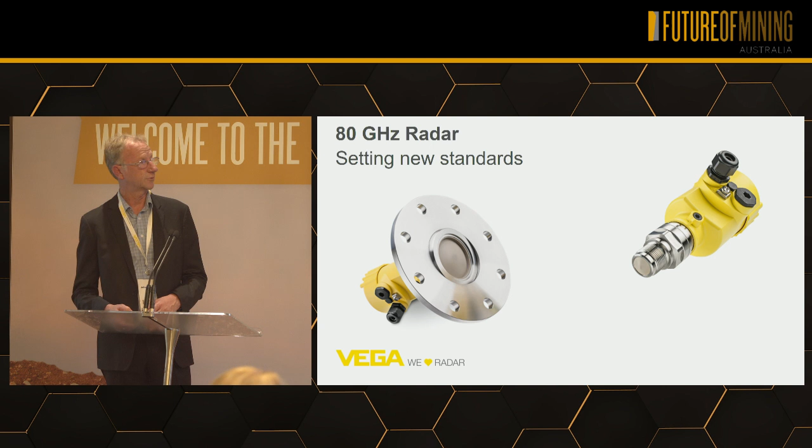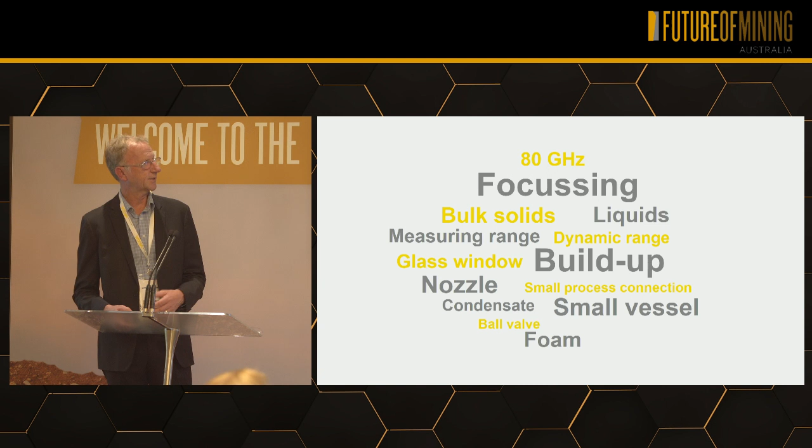These are the sort of things that we picked up in the past that were sort of not faults but challenges. So we looked at all of these particular feedbacks and said, right, we need to develop something that's going to overcome some of these obstacles.

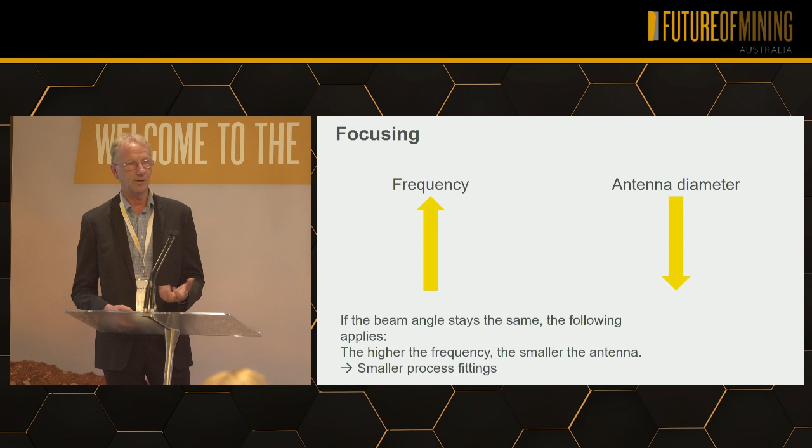Principle of radar: as your frequency goes up, your actual antenna size comes down. The natural outcome from there is you end up with a narrower, more focused beam angle. So traditionally in 26 gigahertz, you had a fitting of 1.5 inch, or DN50, you ended up with a 20 or 15 degree beam angle.

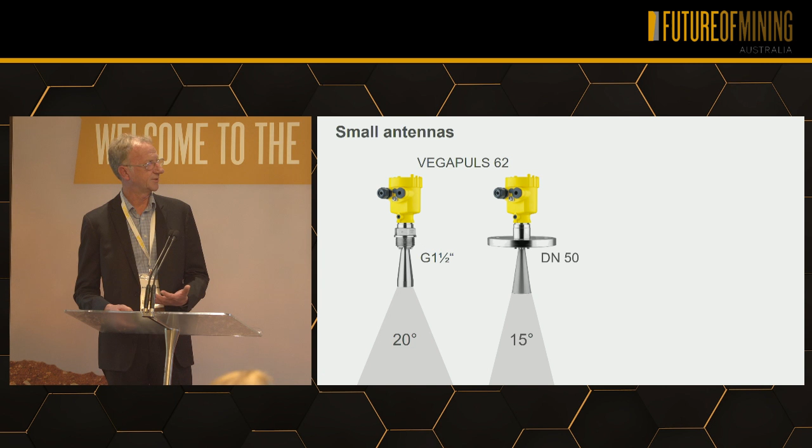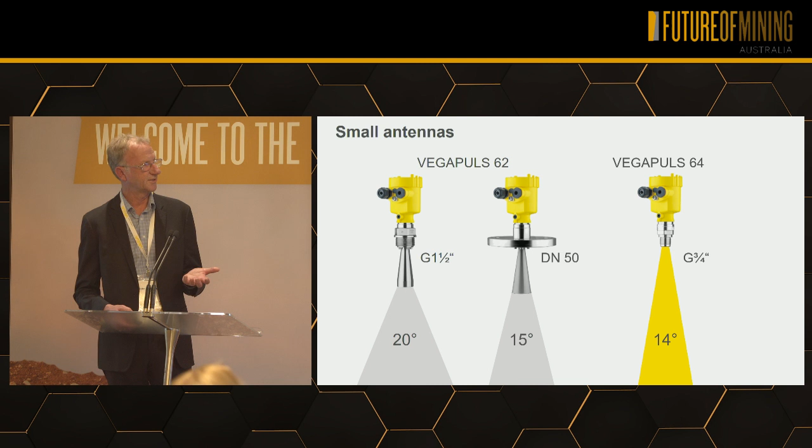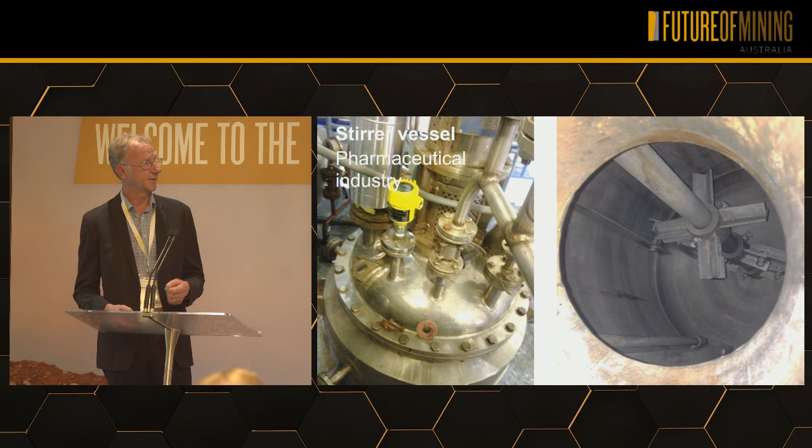Now that we're bringing the actual antenna down to a 3/4 inch, you actually end up with a 14 degree beam angle. The larger you make that process connection or antenna, the narrower your beam. Therefore you're able to get around a lot of obstacles, such as agitators inside vessels. You're actually able now to focus on your real level rather than picking up the echoes from the agitators.

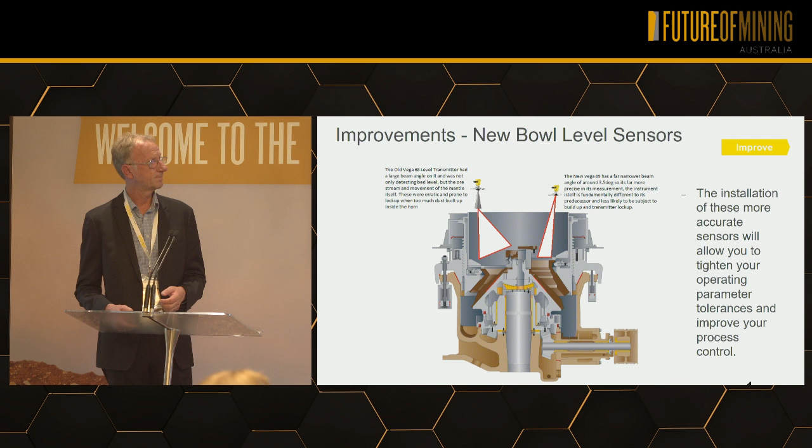Traditionally we had 96 decibels of dynamic range or energy from the system itself. With the development of our 80 gigahertz, you've now increased that by 200 times, or 24 decibels. So we're getting a much stronger signal back, so when we've got a lower or less conductive product, we're actually getting a better return of signal.

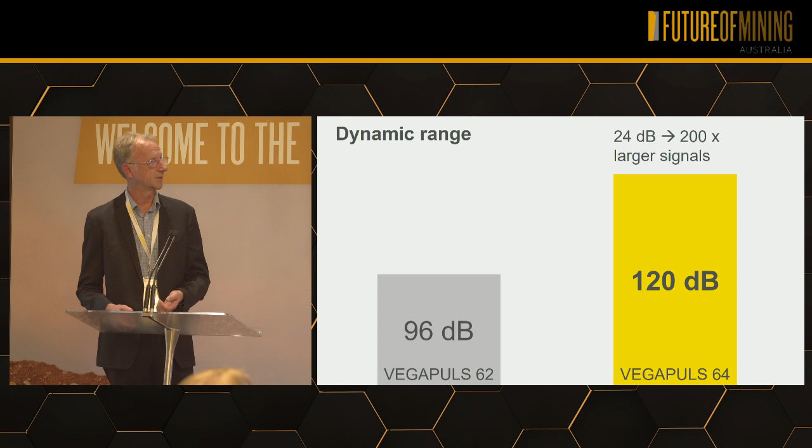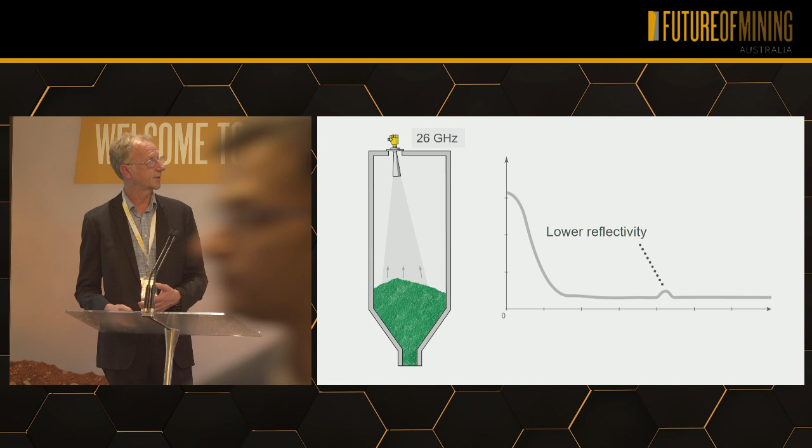Traditionally in an application for 26 gigahertz, you would send down your transmission and you would pick up off low dielectric materials a very small echo. You change that over now to the higher range unit, send down your signal, and you're getting a much higher signal return, so therefore you're getting a much stronger, more reliable signal from your materials.

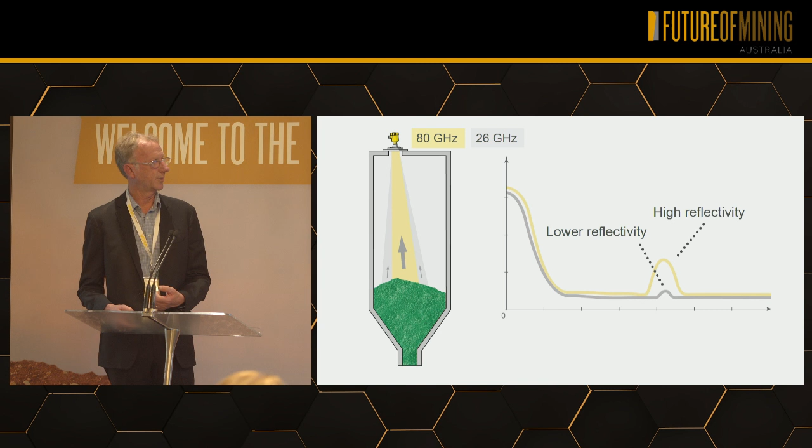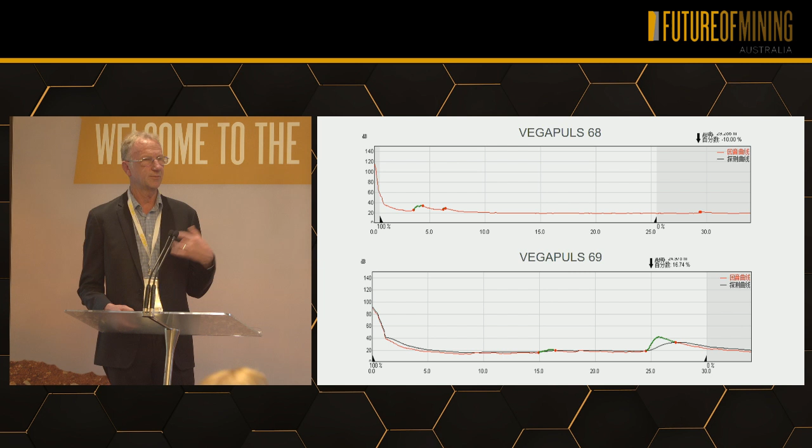Again, with 26 gigahertz, build up inside the vessel itself - if that's inside the beam angle, it's going to see that build up. Those build ups can create false echoes, which means you get false readings. And the more build up you have, the worse it gets.

As you shift over to the narrower beams, you're getting a much stronger signal. You're not seeing the sides of the vessels. You're not picking up any build up. One signal, one return.

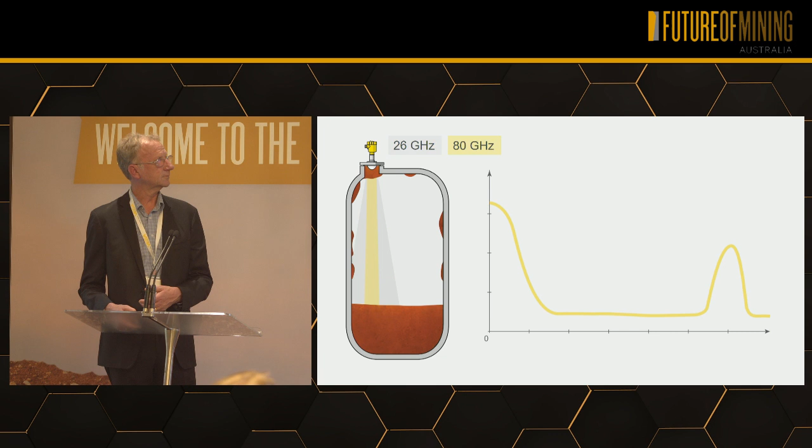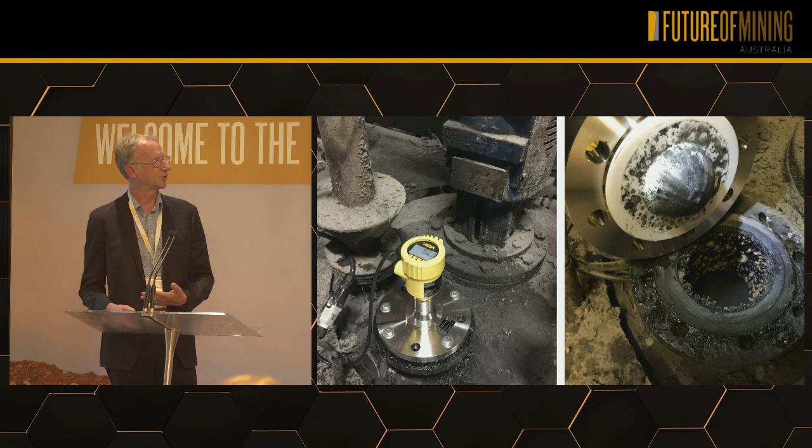In comparison there, build up, as shown here on a bitumen tank, where you've got bitumen on the face. You're not able to see that bitumen, therefore you're not getting a reflection from it or blocking the signals.

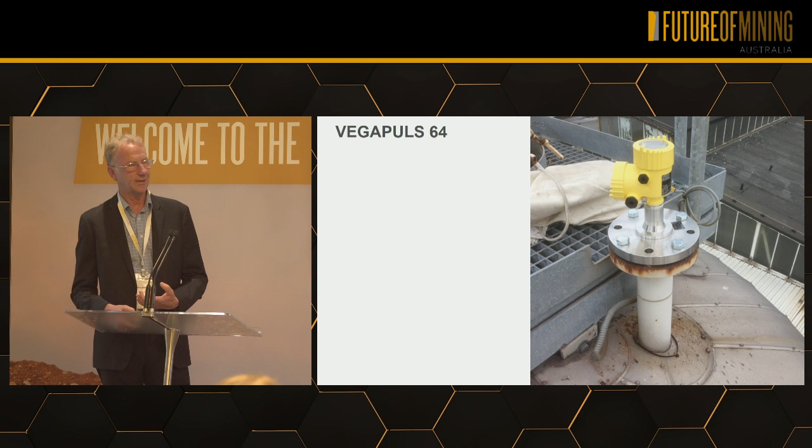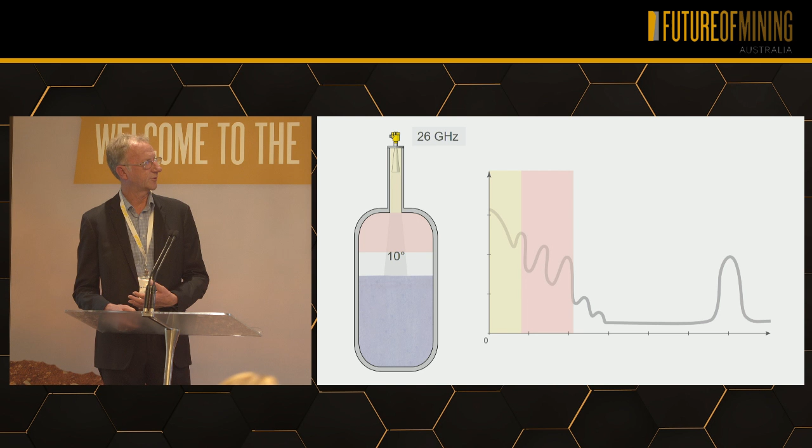We don't control how people install the units, but in these cases here, they're installed in large standoffs. Traditionally what would happen in these sort of areas is that you'd end up with a lot of ringing inside that tube before it actually came down and read the real level. You've got so many different zones that it's focusing on, it ends up losing the signal.

Change it over to the 80 gigahertz frequency. We're not seeing anything inside the standoffs, and all the echo that we're getting is the one echo from the material itself, much stronger, much more reliable.

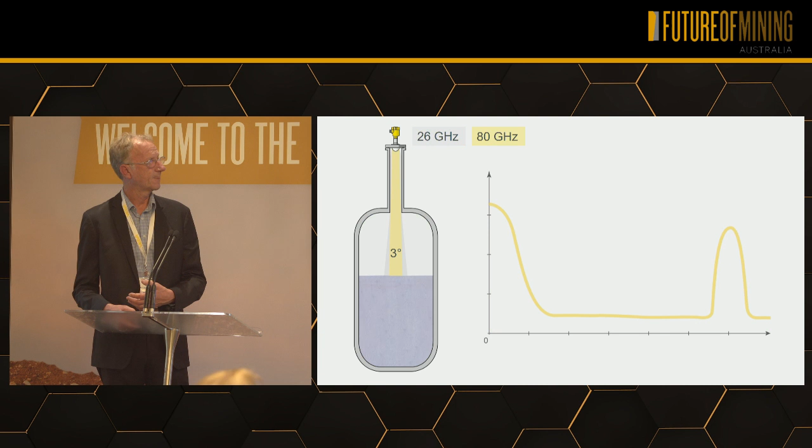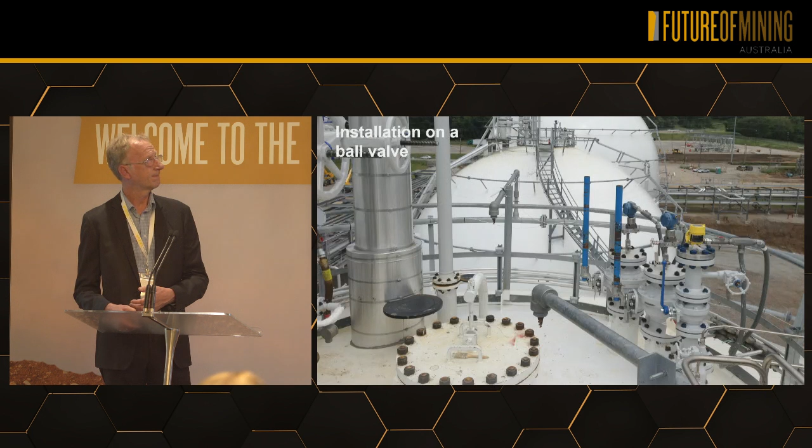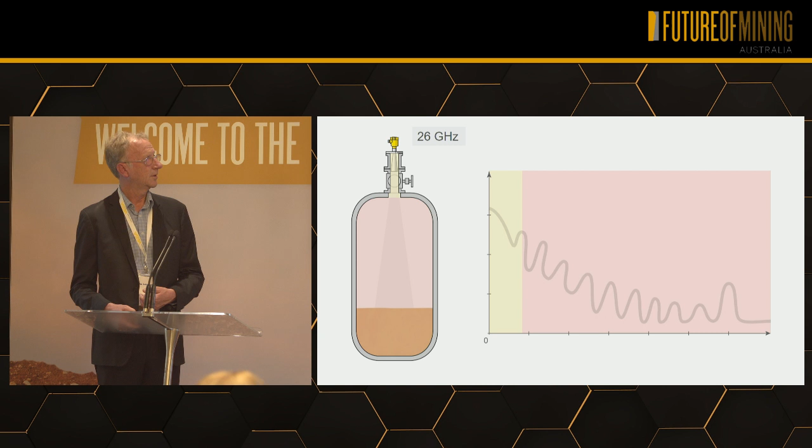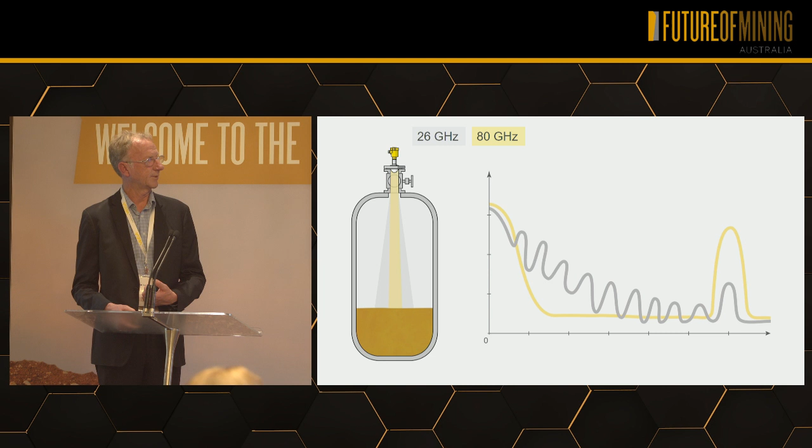700mm socket here, one single echo coming back, no interference. Ball valves, again the same problem, is that you're going to get a lot of ringing inside the valve stems themselves, creating a situation where you don't even know which is the real echo anymore. By going through and changing over to a high frequency, you're able to get around those issues. You're not picking up those ringing echoes, and you've got a much more reliable signal coming back, as in the example there.

Moving into another part is differential pressure. In differential pressure, we again looked at feedback, and we're able to now give a much more precise type of instrument now.

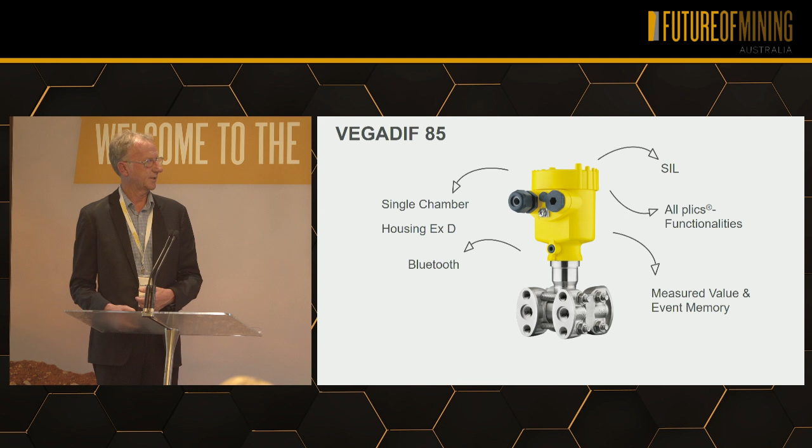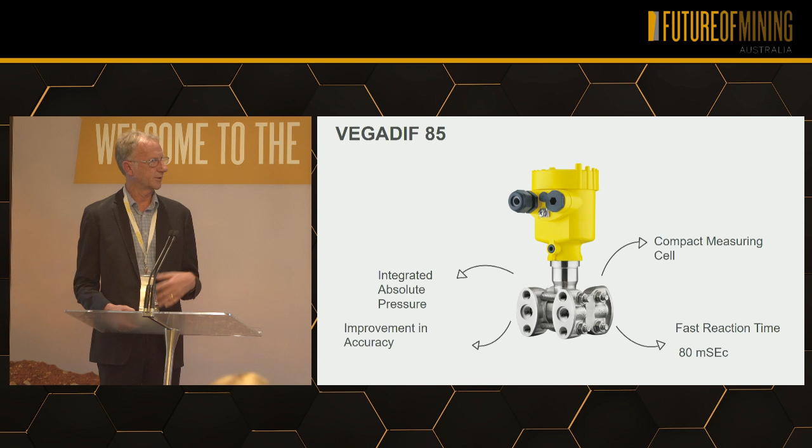Bluetooth technology is something that the future is holding. We've been doing it now for about 2 years - communication through smartphones, iPads, tablets. From there, single chamber EXD, SIL approvals, and you get your measured value and an event memory, in other words, asset management. What you're also getting out of there is 2 outputs, one for your differential pressure and one for your static pressure. So you can have them as 2 separate outputs, faster response times, improvement to accuracies. So again, development of a technology by getting more out of the technology from there.

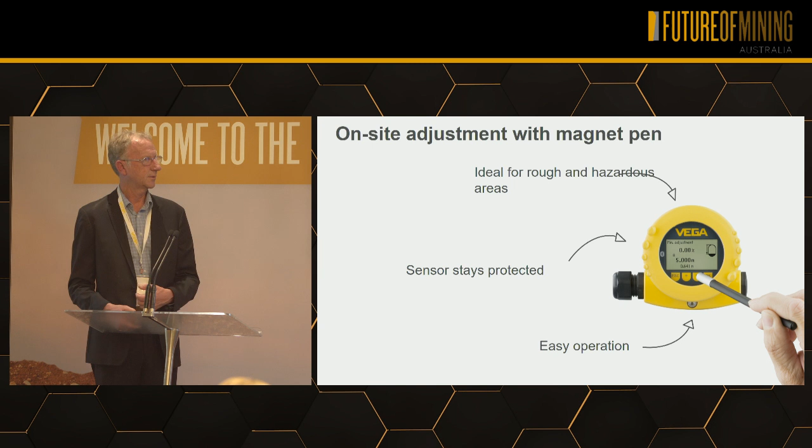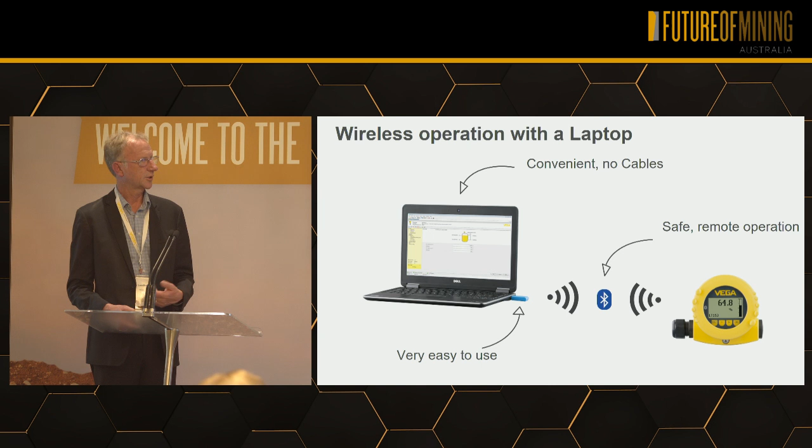Bluetooth, as I said, Bluetooth devices now, across the transmitters. In an EXD environment, you're actually able to operate this through the glass lid, where you can do the programming with a magnetic pen. So therefore you don't require to go in there and break the integrity of the EX area. It can be done via a laptop, communication, Bluetooth 4, communicating directly to the instrument, roughly about 20 to 25 metre range. It can be done through a smartphone or a tablet. The apps are downloadable from the app stores, free of charge, and you just communicate through and away you go.

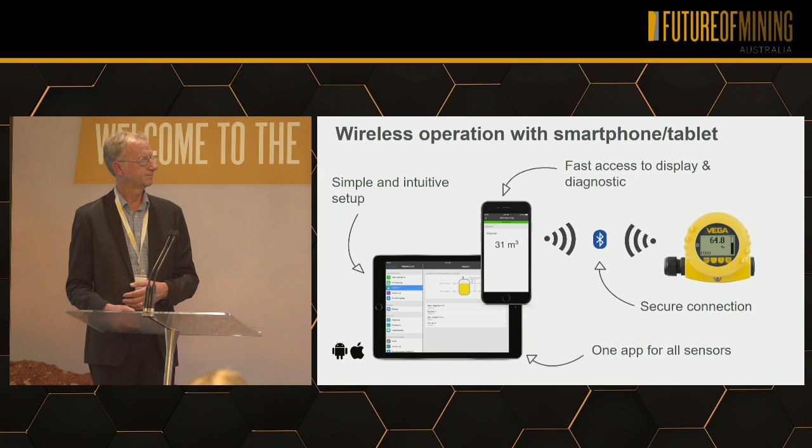Industry 4. Traditionally what we've looked at with Industry 4 is the 4 stages of industry development, from 1784 right through to today. So we've looked at the fact that you've got all your different levels of communication and management. What we've had to do here is look at the fact that everybody has access to the same information, through a cloud service.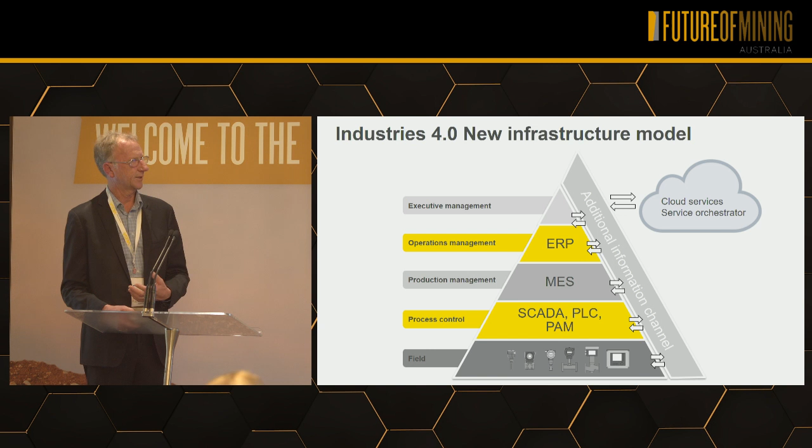Traditionally it's been done through HART, Profibus, Bluetooth communications, and signal conditioning through Ethernet or Modbus. Future which we're under development now is for Profinet and OPC UA - these are currently under development. If we look at mobile communication through the networks, GSM, GPRS are all available, or through the router systems, Wi-Fi, Ethernet, Bluetooth. Again, under development, and heading towards 5G networks.

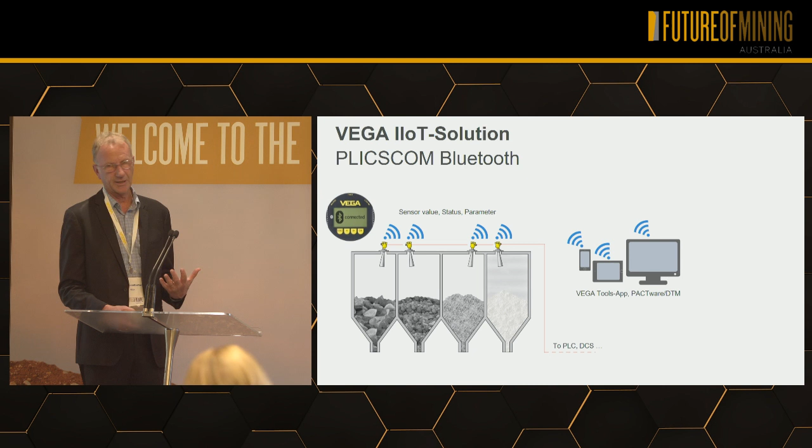So traditionally with Bluetooth communication, it's a case of accessing the information so that you can keep maintenance, stability, everything like that with your instrumentation. So this is a communication, not an output, using this type of system.

The development now is through a Bluetooth gateway where that information can be uploaded to the cloud, and then you can access that information from the cloud. It can be displayed remotely. So it is a case of developing Bluetooth now more as a communication path, as well as an output path.

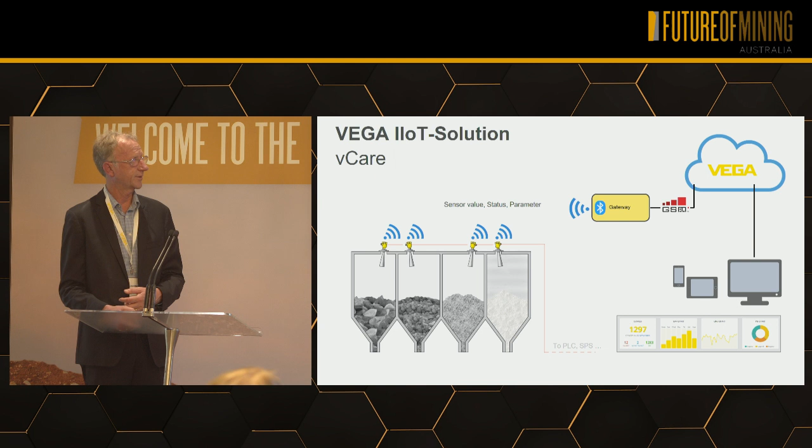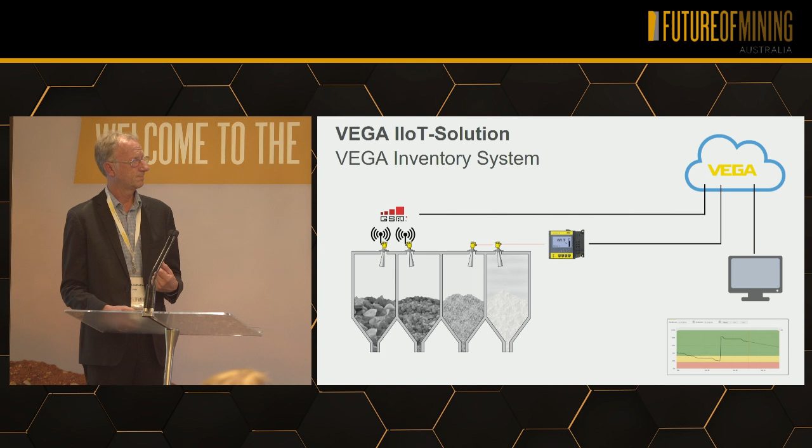Wi-Fi networks, hardwired networks, all go up into the cloud, and that information can be accessed remotely. Again with Bluetooth, up through the gateway into the Vega cloud, and that can be accessed by third-party systems. So again, development towards third-party access through SAP, OPC UA, where you're able to access your own information and control your network and your instrumentation.

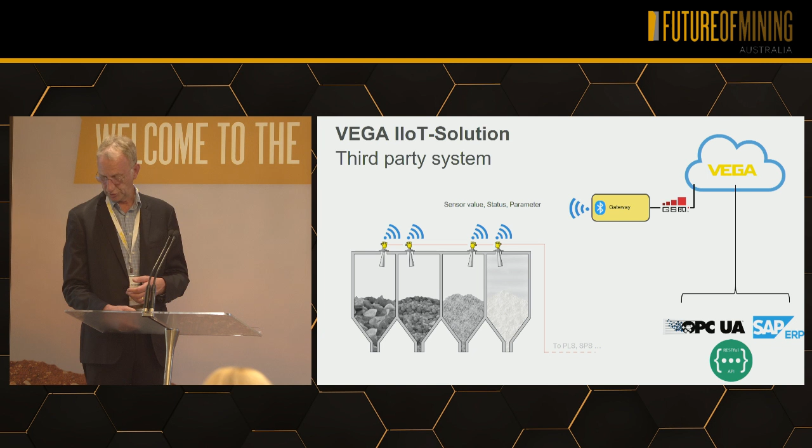Okay, so that's briefly it. We're over on stand 17, that's a brief overview. If anybody wants to come across and actually see the units demonstrated in those types of applications or the communications, by all means feel free.

Any questions? Nice. Thank you.

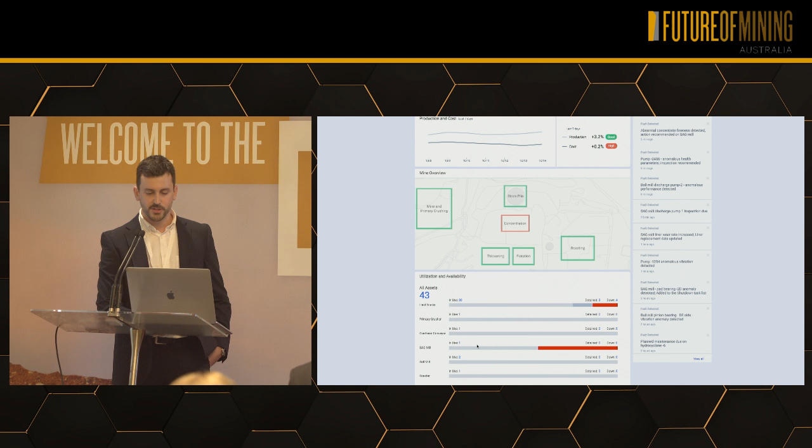We can see production rates, how I'm doing next to the thresholds and objectives I've set up as a company. I can have a quick view of the sectors of my plant, and I can go down and see, of the 30 haul trucks that I have, 3 are detected, 4 are down. But what I really see is a problem in the SAG mill. I have only 1, and the health status of that machine is not ideal. I actually have a problem there.

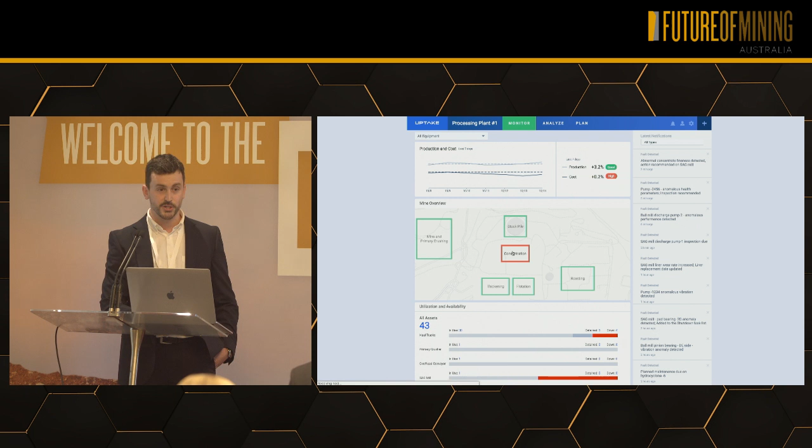So I want to go deep, and this is the moment where the VP of Ops picks up the phone and says, hey, I want to talk with the maintenance manager in charge of this concentration plant, and I want to drive my discussions around the SAG mill. I can see that I have a few bilge pumps, but I know that in a forward-looking approach to maintenance, this SAG mill is at risk.

So I click there, and again, I have a quick view of how my asset is running, if I'm getting the KPIs I've set up for that asset, what's the throughput, what has the history been for this asset in the past week, the past month. This is highly configurable. I can show whatever KPI is important for me, or whatever information I can surface from different systems, from ERP such as SAP or Oracle. I can bring data coming from condition monitoring systems, vibration data. We're going to see that in a second.

In this case, the customer was interested in monitoring liner wear. It was a big expense for them to do the 3D scans and decide when was the right time to change the liner. So one of the things we did for them was help them out with their plant maintenance strategy.

By doing this, we leverage a huge library that Uptake has recently acquired from the energy, nuclear, and manufacturing space, called the Asset Strategy Library. This strategy library covers around 800 assets and all the different failure modes in which those assets can fail. So we were seeing, by looking at SAP data, the most important failure contributors we needed to attack.

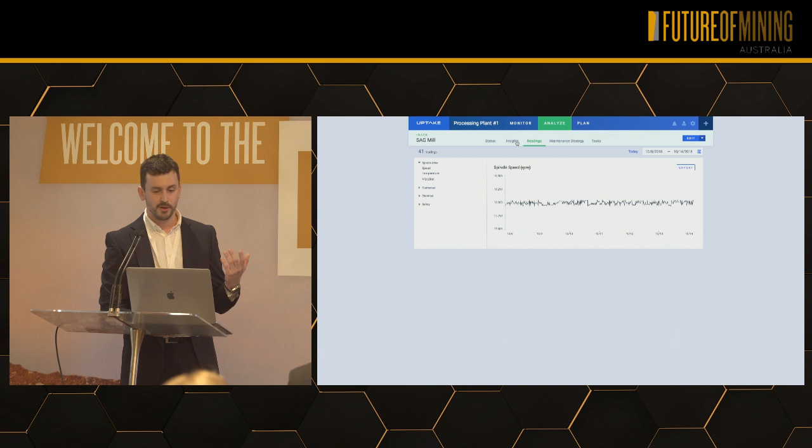But actually, I can go from looking at data coming from the machine, what's the speed, and this is when it gets really interesting, because you can have actual machine learning algorithms that are able to detect anomalies or predict failures.

In this case, our model was looking at different sources of data coming from the machine: RPM, torque, amount of water the machine was handling, the size of the balls inside the SAG mill, and eventually one of the most important readings we were having was the oil pressure at the pockets of the machine.

By looking at all these signals simultaneously, we were able to detect multivariate anomalous behavior and give an insight to this customer, saying, hey, we think this liner will have a high chance of wearing out in about a week. So it's about time you have an inspection made and get your maintenance team working to change that.

What's really interesting is that from this tool, you can go and take action on it. You can go and create a task. This will push the information to your ERP system, to your SAP, to your Maximo. Once you do that, the beauty of this is that by looking at past data, you can pre-populate work order data, and that will save time and save data entry errors from your technicians.

When you go and submit a task, you would actually create a plan, an action plan for this activity. And when you go and see what tasks I have opened for this plant, I can actually see the last one I created for the SAG mill.

But it's certainly frustrating. So the first area, and my background is predominantly underground, was a typical underground coal mine. When I sat and looked at it, we take the most amount of jobs, the most amount of people, the highest risk activities, the most mobile and diesel equipment, and we stick it in the most congested part of the pit, and we expect it to perform. Then when it doesn't, we all sit together the next day, scratch our heads, and say, okay, we'll do it better next time. But we do it every time as if it's the first time we've ever done it, and it doesn't improve.

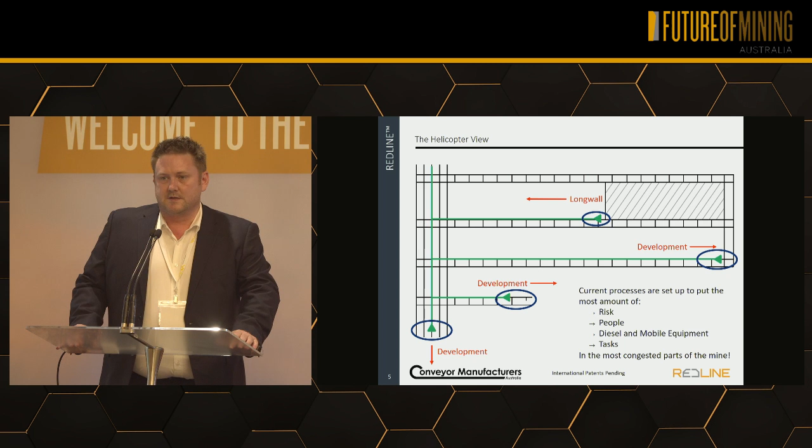And you come to conferences like this, and we talk about the same sort of stuff. So we decided to look at it from a process point of view, not from an equipment point of view. Process isn't nearly as sexy or exciting as looking at new equipment.

So basically what we did is we took as many of those tasks and jobs that are typically done at the in-by end, and we moved them out. So the guys and girls at the face, they are there to cut coal, and that's it.

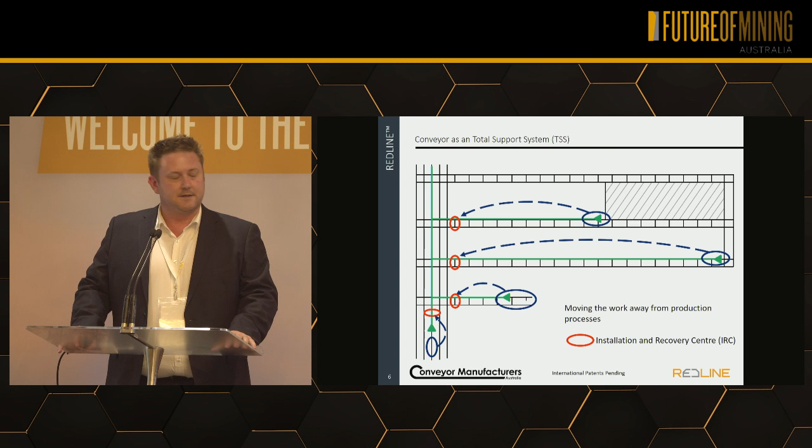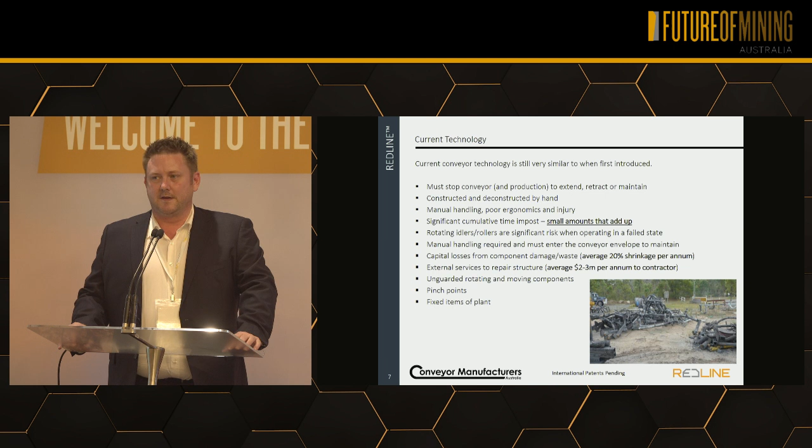All of those other jobs, wherever possible, get taken out and divorced from the process. This was a mine I was loosely associated with, thank God I wasn't the manager, but that's how they managed their conveyor structure. Came out from underground, was tipped in a pile, guys at $70 an hour on overtime spent all shift sorting through it, and paid a contractor $3 million a year to drive out from town to pick it up, fix it, straighten it, clean it, and send it back to the pit.

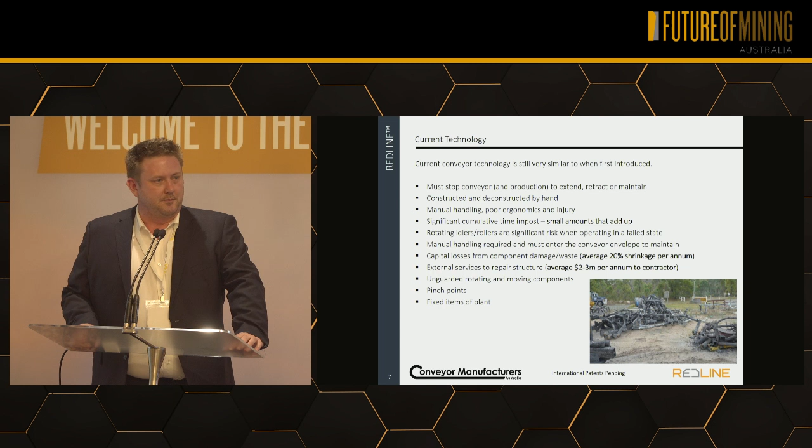And ultimately, conveyors, which is the bit of equipment we chose, have not really changed forever. It's still a big rubber band rolling along on idlers.

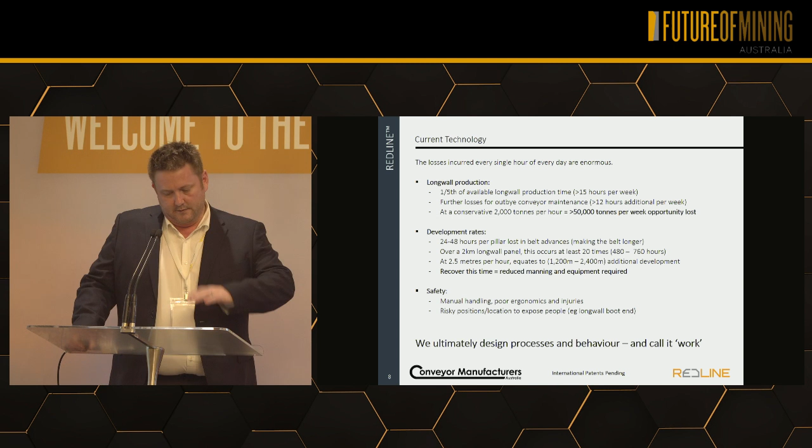So we decided to do something about that, and certainly in an underground mine, and in a different set of circumstances for an open cut, there is a hell of a lot of lost time. We tend to look at the major delays that we report, but it's a little bit like an iceberg. There's a whole lot of inefficiency built into our processes that we don't measure. We just accept that, well, that's mining and that's just part of it. So there's this artificial glass ceiling that we've imposed on ourselves, and we're trying to break that.

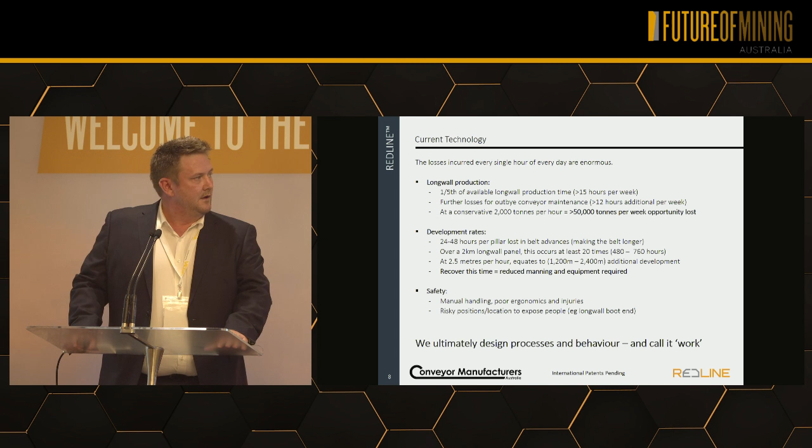So RedLine is our first system, I guess, in solving this. There's some major components to it, but essentially it's like a normal underground conveyor, so a mine doesn't have to go and repurpose their whole operation. They can use a lot of what they already have, but there's some IP in some of the components that we've designed.

Essentially, rather than the conveyor being a fixed bit of equipment that's either hung from the roadway roof or mounted on the floor, it drives along a monorail that's hung from the roof. By that, and multiples of them together, the system can drive along the monorail and operate as one continuous conveyor. So rather than having to extend it and make it longer or shorter, which is a normal part of the mining process, at the inbye end, which ultimately stops production, we can do that from the outbye end without stopping production. So all of that time is brought back.

There's a hell of a lot of manual handling and other safety and cost benefits as well, but really the extra production time is the big one.

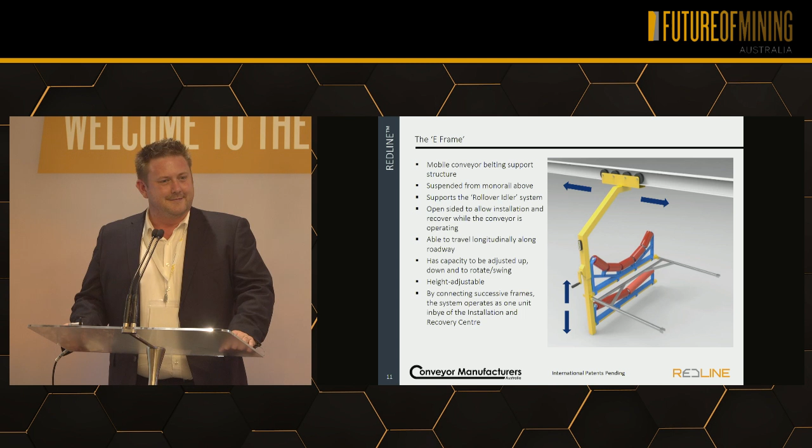There's a height adjustment mechanism as shown there, so you can grade the belt up and down. They say the simple ideas are often the best. The height adjustment mechanism isn't too dissimilar from a Hills hoist, the clothesline. We were living here in Sydney, and I was teaching the kids to swing around on the line, and I fell against the handle, and yeah, that was the solution.

Simple, but it works. The rollover idler is a second bit of equipment that we've come up with, and this allows idlers to be changed on a conveyor without having to stop it. So it's not just for our underground conveyor, but any surface conveyor in any other industry.

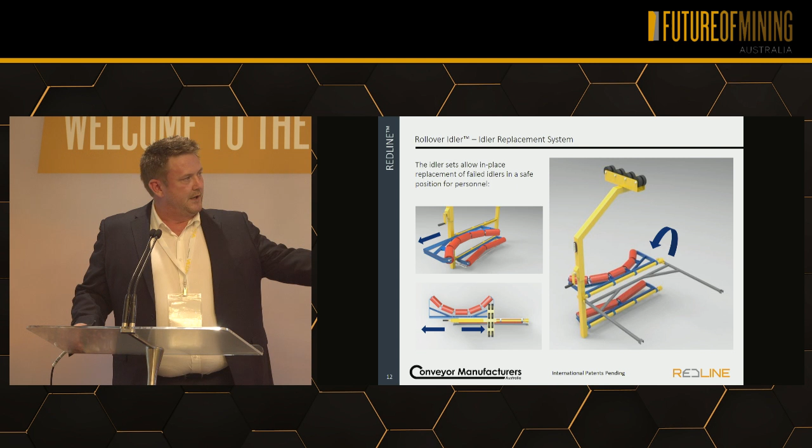The whole idea, rather than a lot of systems where you have to reach into the conveyor and install something to lift the belt up off the idler that's failed, is that the idler comes away from the conveyor and the conveyor stays as it is. But it's replaced, removed and changed from the safety of a walkway or away from the operating conveyor.

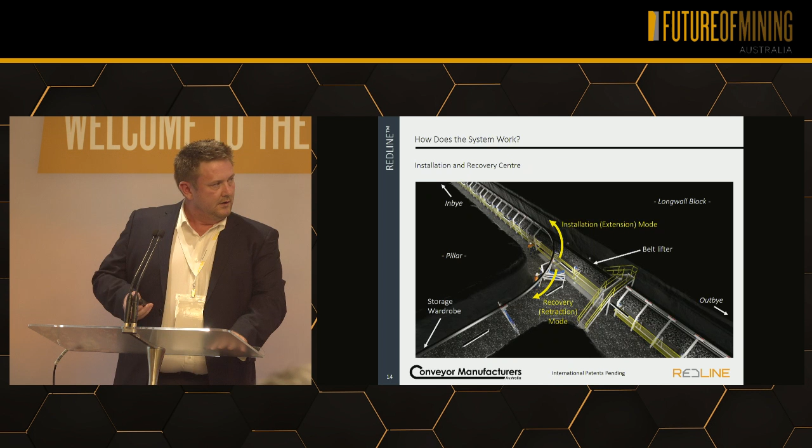This is a pretty image, I guess, of the installation recovery centre where we make the conveyor longer and shorter. So this is outbye in the panel, away from the production area. And from that point in, up the page, the conveyor drives along that monorail and operates as a full, complete system. And the reverse during production when the conveyor is coming back out.

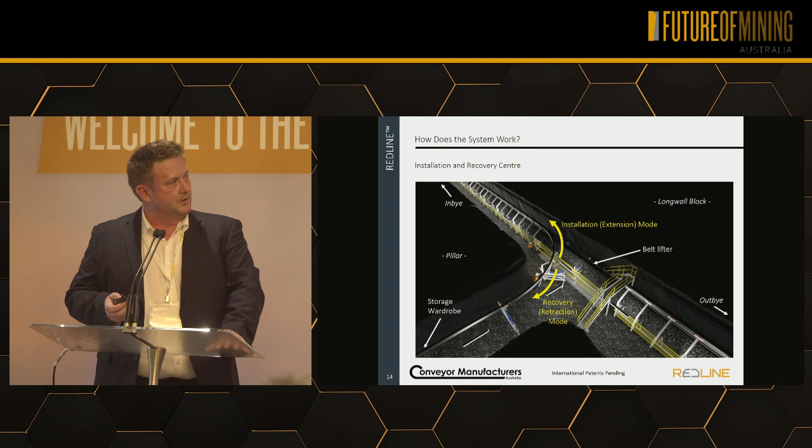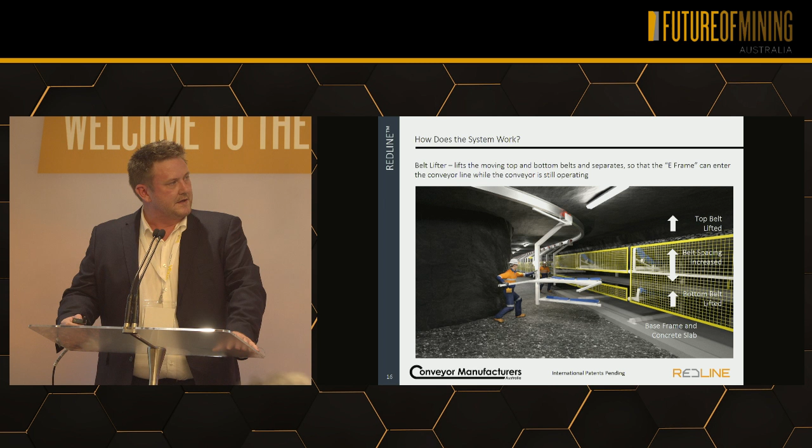So in terms of what's the impact for a company, pretty significant. We ran a model last week for a client we're discussing with, and on their operation, they expect to be able to cut about 25% more coal a year without any extra expense. So it is a significant amount of money. And at the moment, coal price, depending on the product or whatever, can be several hundred million dollars a year. So needless to say, they're fairly interested. Or in the other part of the cycle where prices aren't as high, you can reduce costs.

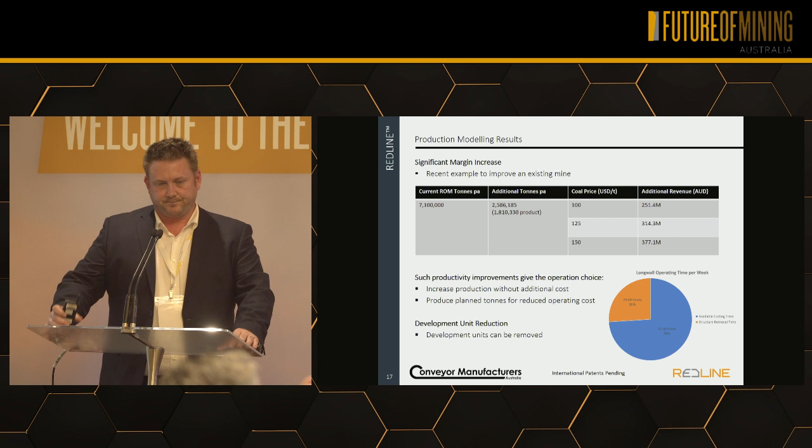Our other system is a Containerveyor. This is more aimed at surface power generation, ports, open cut mines, that sort of thing, and certainly not just coal.

The Containerveyor really is designed to fix the problem of fixed infrastructure. At the moment, conveyors are regarded as fixed assets. Once they're in place, they're there. They're concreted into the ground, they're built by hand. You can't really recover them, and if you do, they're not worth much, and they cost a hell of a lot of money to move. Certainly in New South Wales, regulators are now making you fully rehabilitate the prior site, so you can't just bury them like we used to. They've actually got to be physically taken away and disposed of.

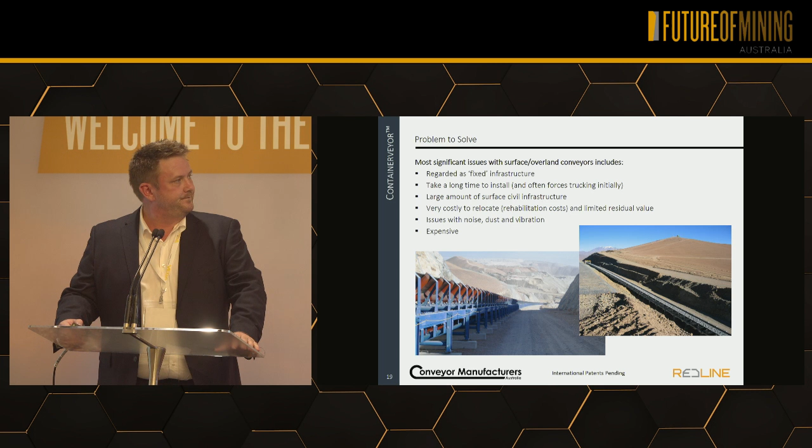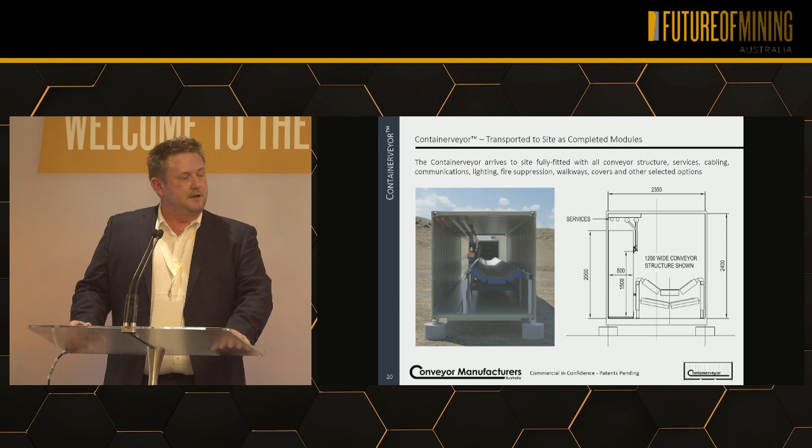So how do we do it? It's the humble shipping container. The shipping container is fitted out with the conveyor at our manufacturing facility, and it arrives to site in a plug-and-play format. So any options you choose, be it pipes, cables, lighting, fire suppression, walkways, whatever, is all fitted out prior to arriving at site. So it is a registered shipping container. It is transported to site as a shipping container and then becomes its operational framework, I guess.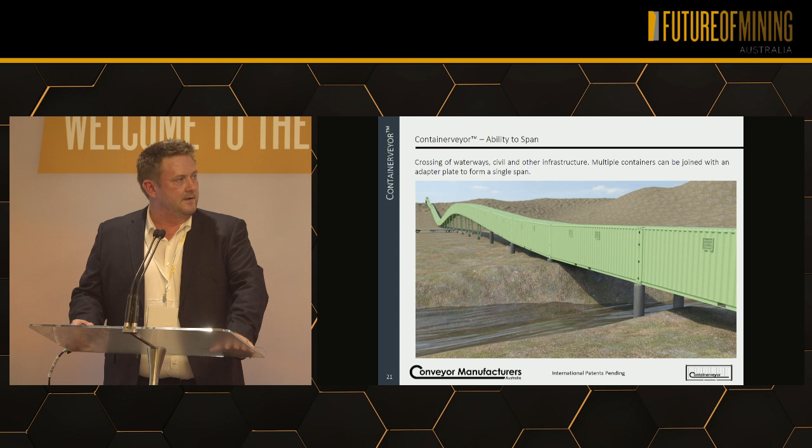We can span up to 2 modules at the moment, so 80 feet between foundations, perfect for gantries and that sort of thing. We're working on a major international airport at the moment with this system, and it had to be fully enclosed because they're transporting fly ash and cement powder, and this is essentially a view of the system they're looking at obtaining.

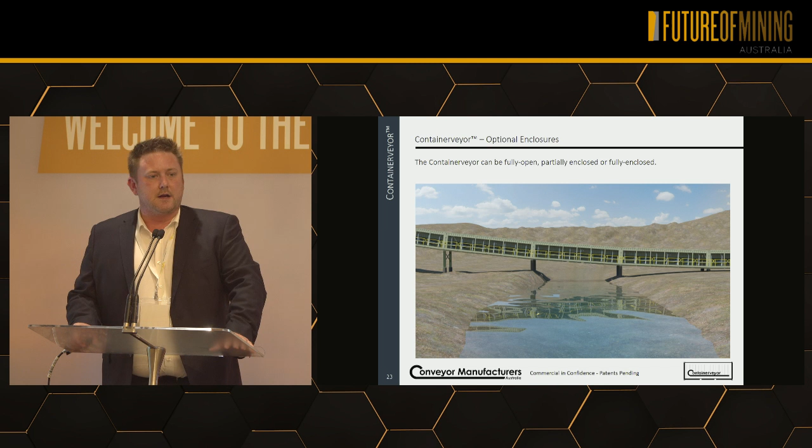The sides of the container are able to fold out if you want, to provide an external walkway, which can be fully covered. Very, very simple. There's no rocket science in any of it. There's a hell of a lot of engineering in it, but there's nothing tricky about it.

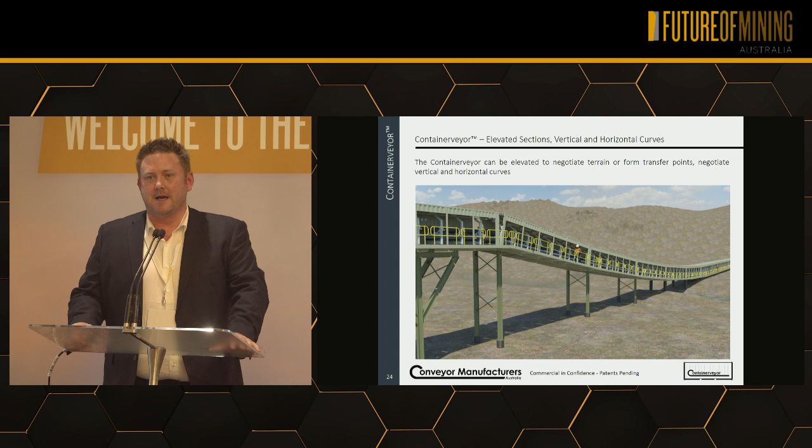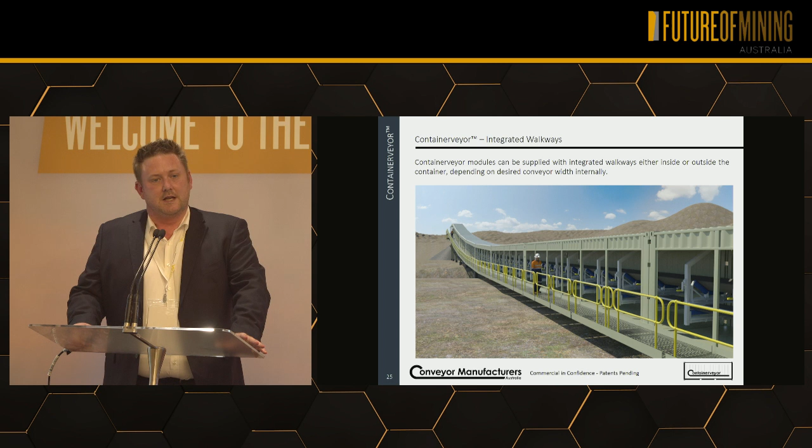But again, it's trying to address those fundamentals of time. In this instance, the time to install an overland conveyor is usually fairly significant, and operators will want to truck product or material while the conveyor is being built. Because it takes so long, and usually where they are, it costs a hell of a lot. These being modular, you can pick them up and reuse them very inexpensively.

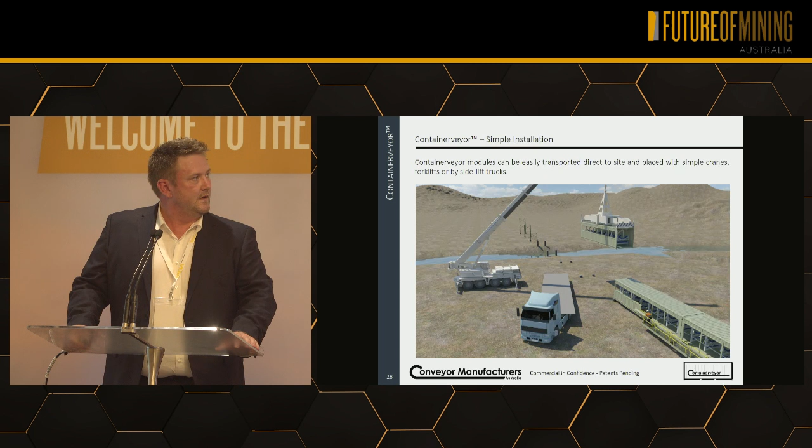That's me. Any questions?

Yeah, sure. Really enjoyed your presentation. Thank you. The container, it seems to me, after you put the modules together, putting the conveyor together is more work than the traditional method.

No, it's the same, it's just pulled along. Rubber, pulled along - how do you normally do it? You do from one end to the other, just a winch. Is that how it's normally installed? Yeah, yeah. Our other version, every module is its own conveyor system, so you could go around right angles, up steep gradients, around an obstacle, or whatever.

So like a cascading system, this design will make it easy to move it from one location to another. Absolutely, yeah, absolutely. There's an operation in WA we're talking about - they buy a new conveyor every 2 years because their pit moves so fast, and because the old ones aren't worth anything to recover. With this, they will only have to buy 2 for the rest of their mine's life, and they just leapfrog them.

One more question - I know conveyors are known for safety concerns, and the part you showed in the underground mine, where you can continue operating, it worries me that there could be a safety concern there. The whole point is that you can do it away from the conveyor. Some companies will choose not to touch a moving conveyor at all, no problem. But even so, with that system, the time taken to replace a failed component, or just wind it away from the belt so it doesn't cause damage, is a significant improvement from now. Yep, and combined with monitoring, it's perfect.